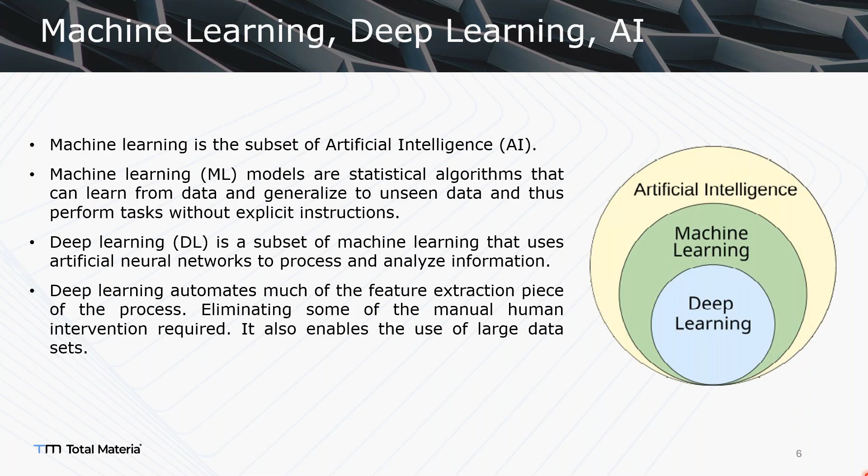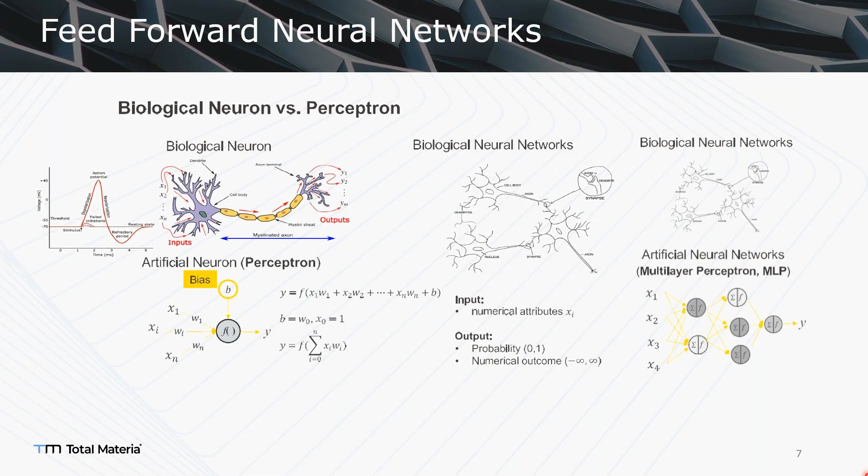So where did this concept come from? Basically, it came from the biological neuron, because we're trying to mimic the process of human thought, so we need to model this in the computer. When we model these neural networks, it's called a multilayer perceptron. I will go into detail in the next slides.

So what we are doing is trying to understand a relationship between input and output. We can clearly say that it is a universal approximation algorithm, because you can use it for different things with pretty much the same neural network structure. But in explicit programming, like normal programming, you cannot do that.

You need to customize your program in order to get a meaningful result, or in order to not get an error. So it is a really important thing. And by the way, as you can see, these equations are just a linear combination between them. You're just making a regression from this, but we're giving some nonlinear activation functions so that we can model really nonlinear concepts and relationships. Yeah, we can go on.

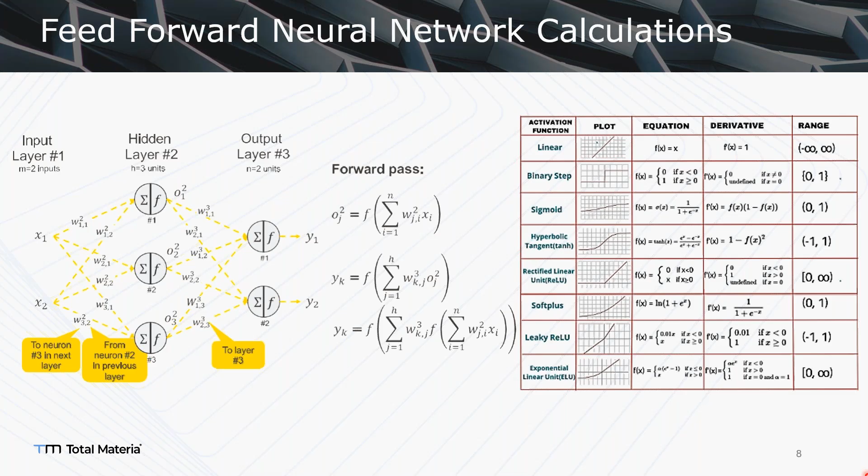Basically, what I understand is that we're just mimicking some outputs and creating a relationship between the input and output. Am I right? Yes. According to this, with a given data set. Yes. So this is how the forward pass works, not the whole training concept, by the way, just the forward pass. So you're just getting input and output.

So as you can see, here you have an expected value and an input layer. So you're just trying to get an accurate result from it. But from the start, as you can see, it is not really accurate because it's only one feed forward process. And I need to say that the weights in the start are arbitrary, so they are randomized.

So that means if you have a neural network, you can get different results as well, because of the initiation of these arbitrary weights, because it affects as well. It happens, but in really good neural networks you don't get it, or it's not a big difference, I would say. Okay, we can go on.

So can we say that the genetic algorithm is similar to the deep learning algorithm? Or are there any differences? The genetic algorithm is an explicit program. So it's just like normal programming. It tries to find the optimum solution, and sometimes it creates new data, I would say. But for this, you are not creating new data.

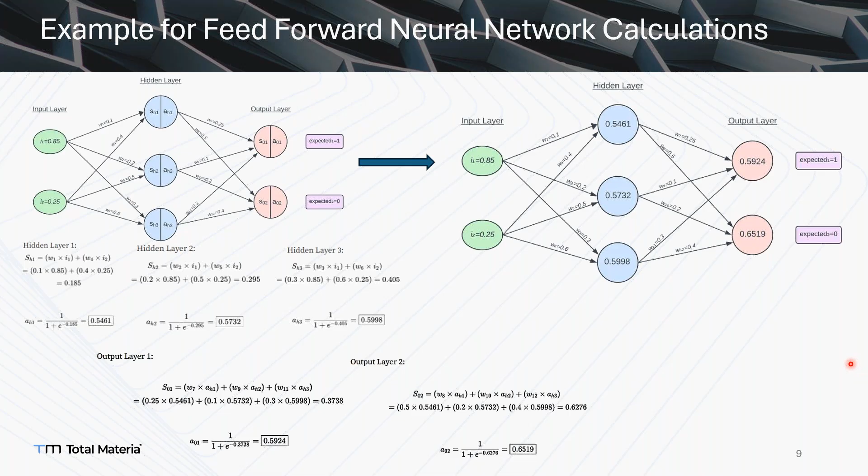So the important thing, and I would say the most important thing, because after these concepts were given to the world, it changed neural networks, machine learning, deep learning. So we have expected outputs and calculated outputs for the first feed forward process. We get that they're not similar. So what we need to do is accurately calculate this, right? We need to go for these expected values.

So in order to do that, I can define a loss function, which is the difference between them. By the way, loss functions can be different. This is just an example, and you are selecting your loss function by your need. You cannot use every loss function for every type of analysis or type of algorithm. So when we get this loss function, we can say that we have a total error in the neural network. So how can we decrease it?

So we can take a gradient of this, because we want to minimize this loss function. That's the whole thing, and it's called backpropagation. Backpropagation is an algorithm to compute the gradient of the loss function with respect to each weight. After that, the neural network propagates this error back from the output layer to the input layer.

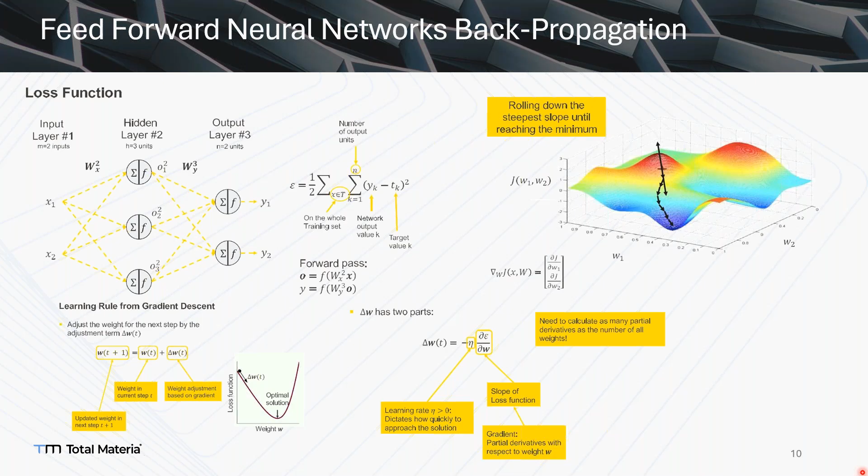Okay, this is the gradient chain rule for backpropagation. As you can see, every weight contributes to the output. So you can use the chain rule to calculate the gradients. We can go on.

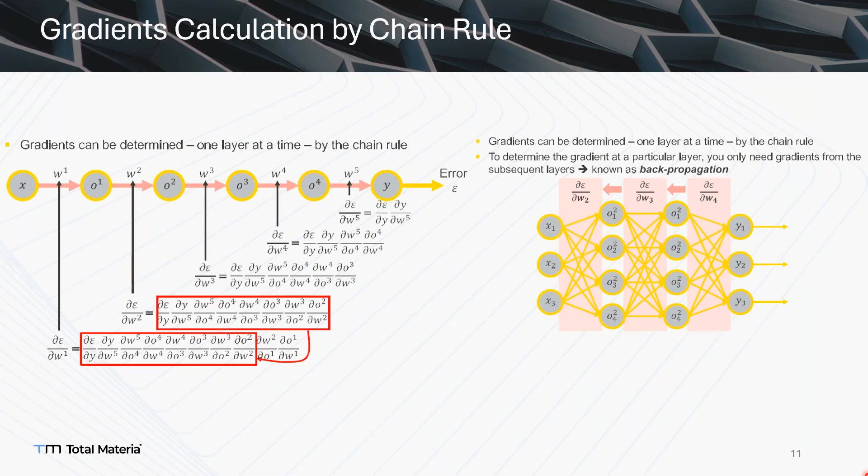Okay, so after that, as I said, you can update all the weights and run this sequentially. So at the end of the day, you will get a maybe pretty good neural network, I would say. Yeah, please go on.

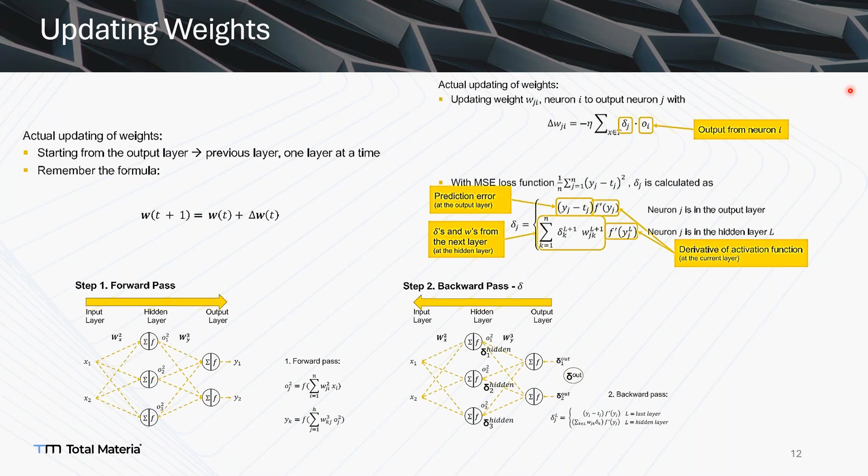The other thing is the learning rate. When we are doing gradient descent, we need to find a step size or learning rate so that we can get closer to the local minimum or global minimum. It's just a gradient algorithm we are approaching here. It depends on what the learning rate is. If it's too small, the iteration will be longer. If it's too large, we cannot find the optimum area because of the too large steps. Yeah, that's all. Yeah, you're right.

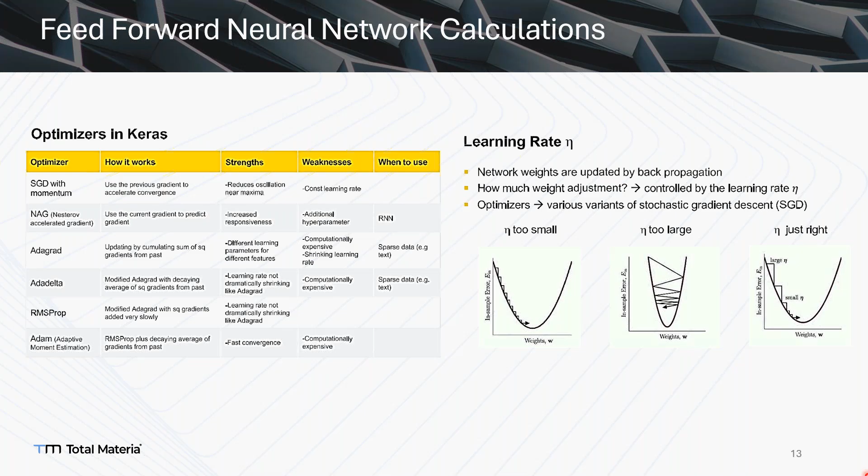Okay, so how can we use these algorithms for inverse design of metamaterials? The concept behind metamaterial design is really complicated, because you don't have a good way to design these materials. You don't have a behavior or a pattern for these materials.

So classical design algorithms could be really painful, because you don't know, you're just trying and getting FEM results, and after that you're just trying to get a closer stress strain curve to your model or your needs.

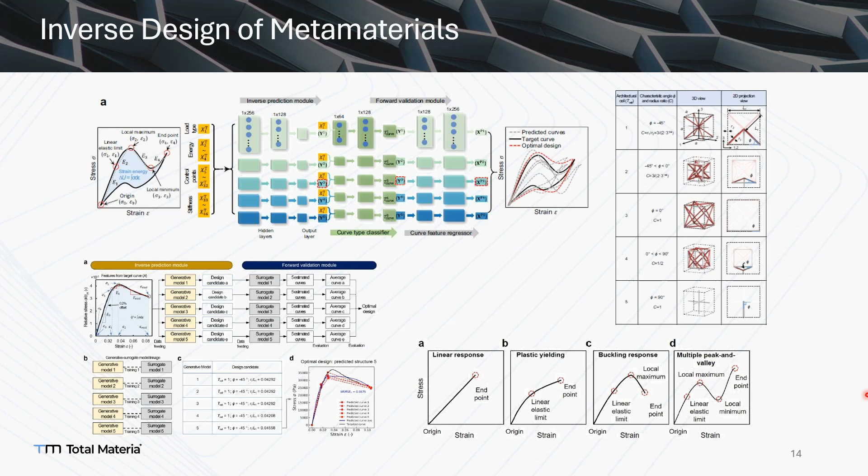I see. Okay, so as you can see, this is the results from this work. It calculates, or it gives the design curves, and from that you get these kinds of geometries. You can understand that it's really pretty understandable, these kinds of behaviors. Maybe I can say for the fifth, you can understand that we will have a local collapse. In the compression you will see a local collapse, and you're seeing a relaxation effect or a local collapse effect, and after that densification. It is pretty understandable, and it gives pretty accurate results, by the way.

There is also a normalized root mean square error prediction value in here. So we have a target curve and the measured one, which is what we have at the end of the simulations. So we are predicting which parameters, which geometry fits, or what we need actually.

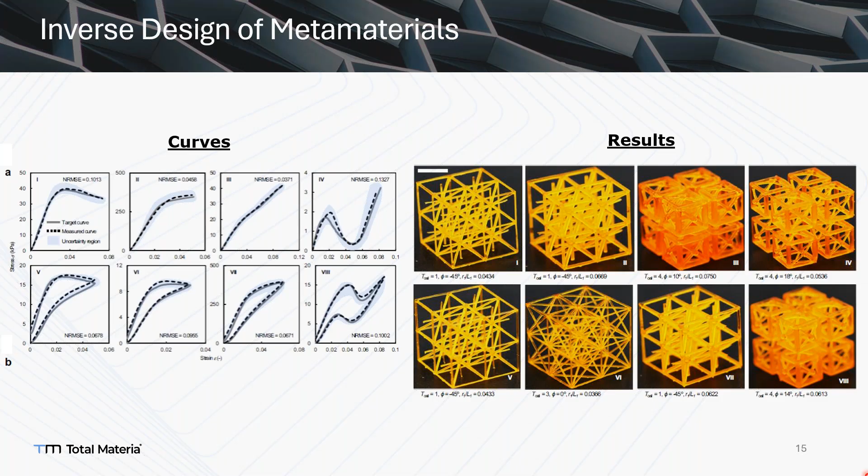I'm jumping to the optimization solutions. In the agenda, the second topic is topological optimization. But first we need to understand the differences between parametric optimization and non-parametric optimization. Parametric optimization was also mentioned - some parameters need to be handled, some features, some radiuses, some dimensions changing by the inputs, and also we have some results and feasibility at the end. These curves could be fit, and these parameters can be handled, and this is the final and optimal result. This is a parametric optimization approach.

Many techniques we can mention about it, but this is not today's topic actually. But at the end, you have some response surfaces according to the input parameters, so you can define everything - every parameter and every parameter's behavior affecting the results.

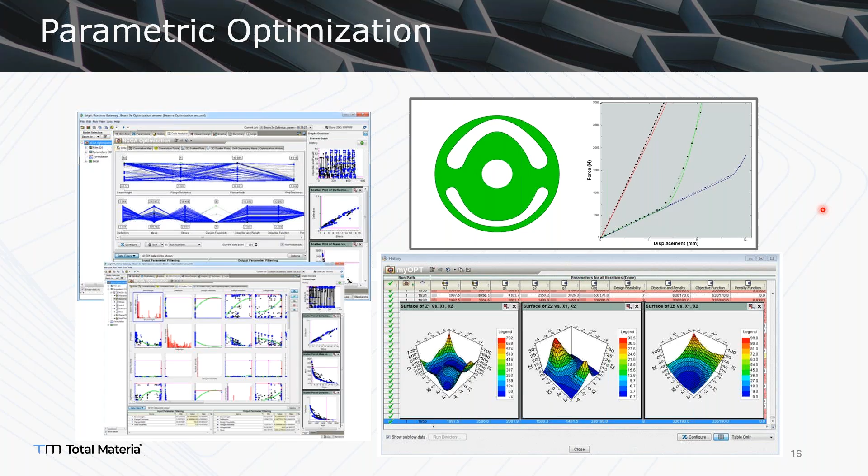In non-parametric optimization, I would like to say - four different optimizations we can mention - one is topologic optimization, and today's topic is also about it. The other one is shape. I will also mention shape later, bead and sizing.

This one is really interesting - for example, in your finite element model, you have a bunch of shell elements, and by changing only thicknesses, you are searching for some eigenvalues or some bending stiffness, for example. So we can go for it.

In bead optimization, you have some design areas where you could change the height of this feature. You are not changing the thickness, you are just changing the feature dimension, the feature height dimension.

So another one is the shape optimization. Shape optimization means that we have a finite element model with nodes and elements related to each other.

By changing the surface, this means changing the nodes, the surface nodes, inner or outer of the surface, to actually change the geometry. This is useful for fatigue analysis, by the way. I will also mention about it.

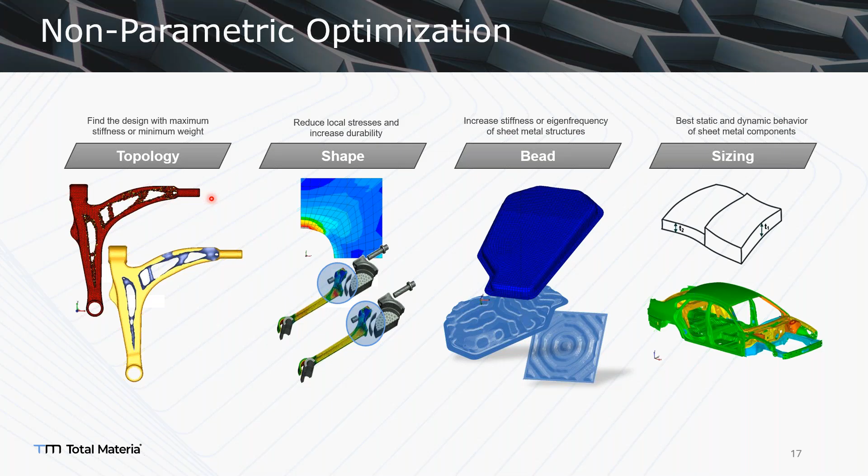In topological design variables, we mentioned the parametric and non-parametric approach. In the CAD model, we have some parametric dimensions, for example discrete or continuous differences, or some material properties like Young's modulus and Poisson ratio. These are the parametric approach. In the non-parametric approach, you have no parameters; you are searching for the final solution.

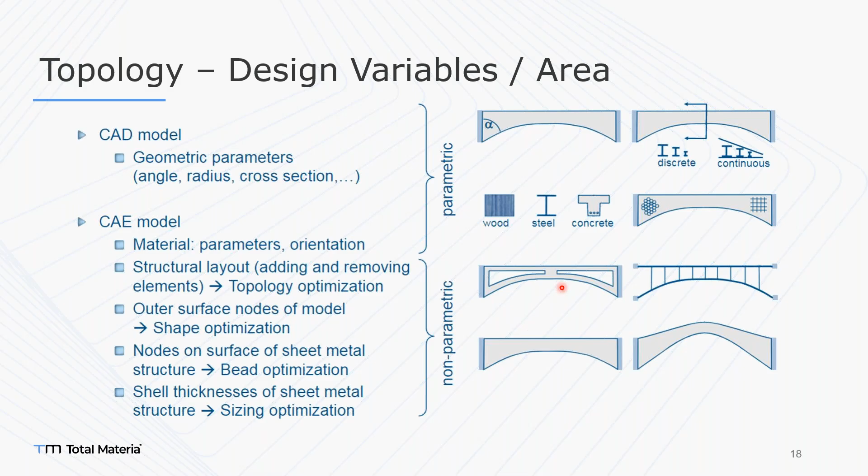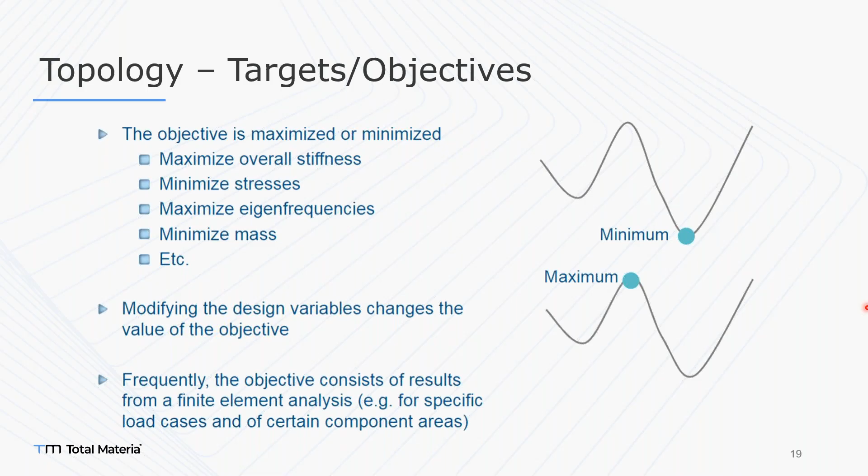So the targets are similar to the parametric optimization approach. You have a local minimum, a local maximum, and also a feasibility area. You just maximize or minimize something. For example, you may want to minimize the stresses and maximize the overall stiffness, or you could minimize the mass.

In order to do this, you will have some restrictions and constraints. We will also mention some symmetry conditions and casting conditions. Please don't think this is the only way to manufacture it, or the only way to get parts by additive manufacturing — that's really a big lie actually.

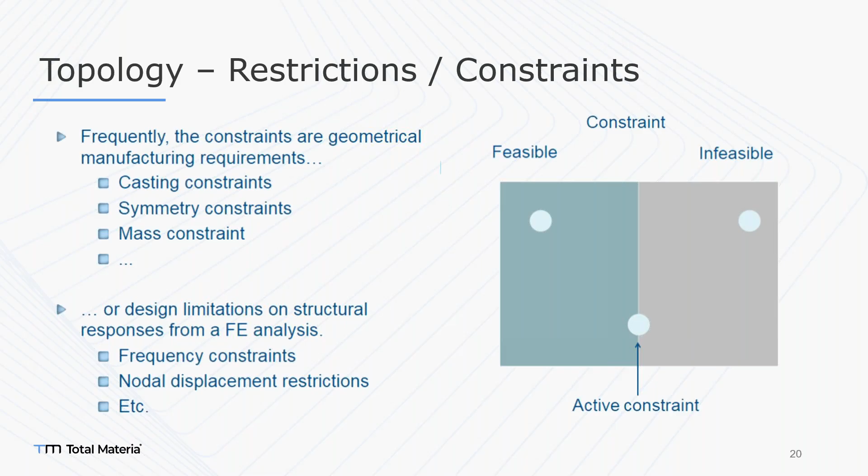With restrictions, for example casting restrictions, you may be able to create your part as a cast part or forging part. You may also be able to create your part as a machining or NC part. So you need to think about the restrictions and constraints for your manufacturing effects.

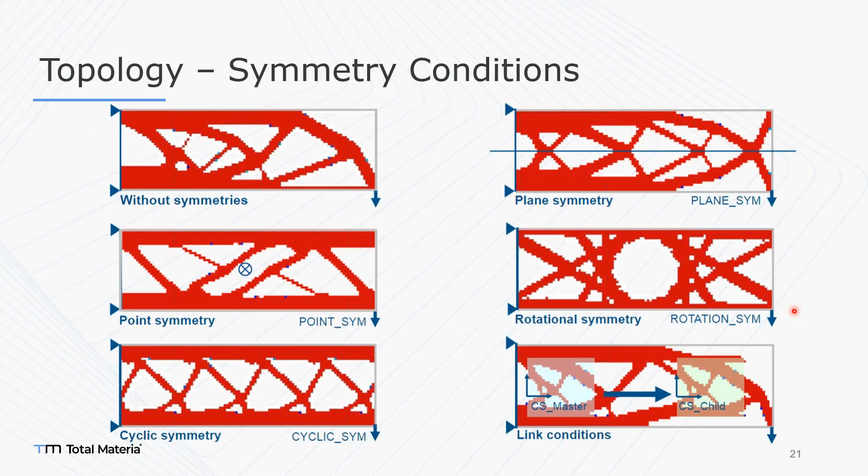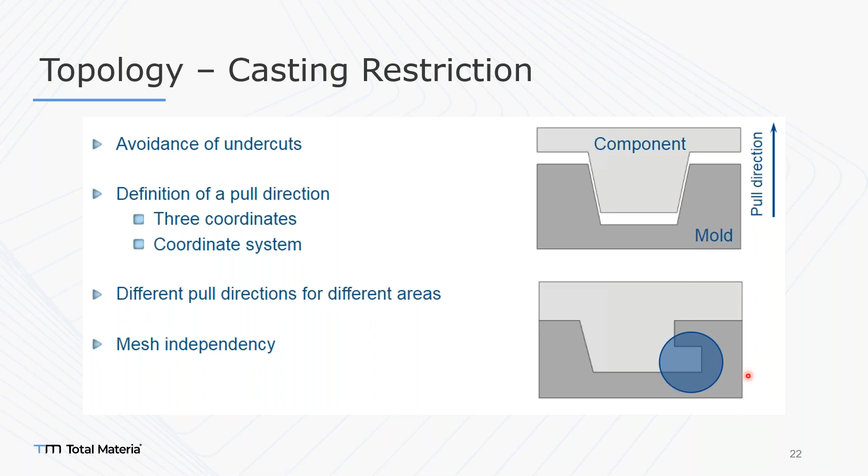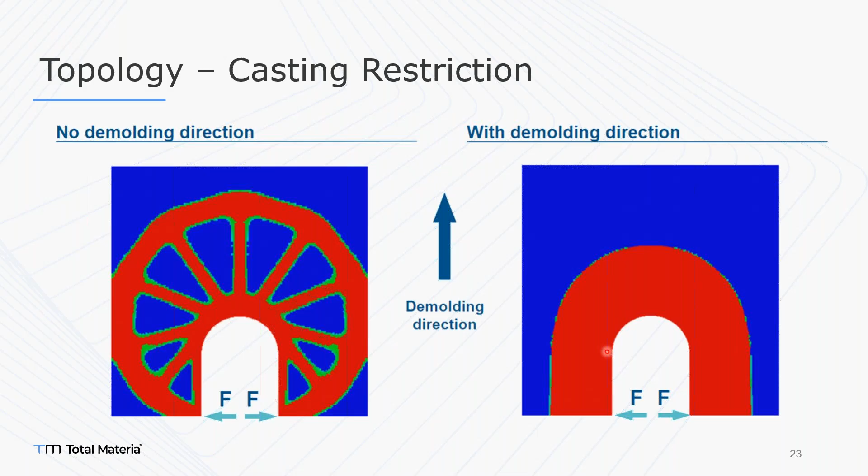Another example: you have the demolding direction in this direction. Without the restriction, you have a bunch of thick elements, thick parts. With the demolding direction applied, you have just one part like this one.

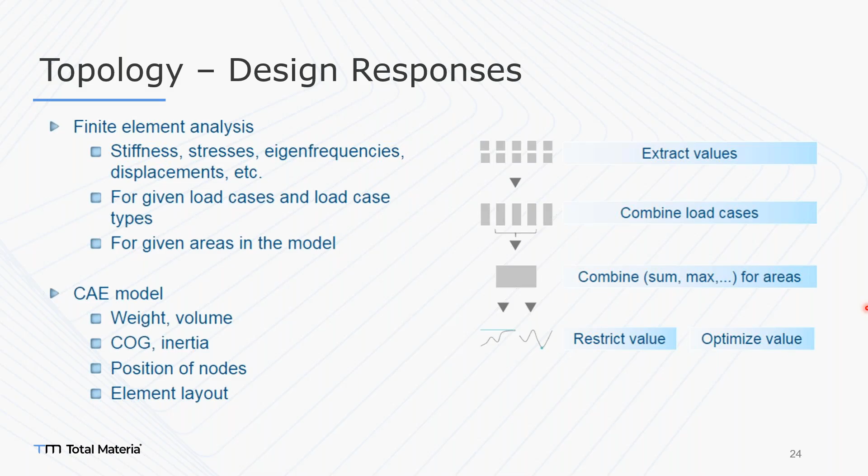So design responses in topological optimization — what this means is responses related to design, for example the combination of load cases, some weights or inertias, and the results, maybe stiffness and displacements. In finite element analysis, these are the responses at the end of your results. There's also another topic I need to mention: the load case scenarios.

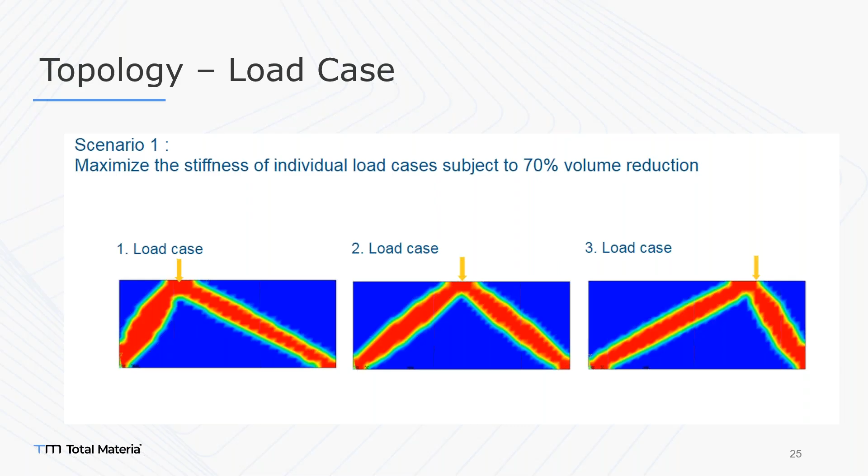So we have a bunch of load cases like this one. There is a restriction here at the bottom of the surface. Load case one applies this force here, here, and the third one is here. All these results are different solutions, so different geometries. The goal is to reduce the total volume by 70%. If we have a combination of these load cases, for example 3 loads, they will not affect the same time — they will have some weight factor.

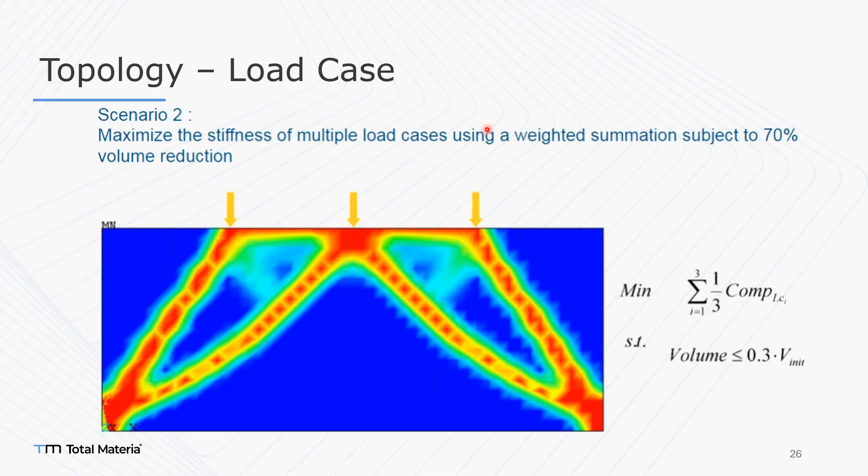Bartu also mentioned the weight factors in deep learning. The weight could be different according to your scenarios. For example, if you have a really low-probability scenario, you may also constrain the different weights of the simulation object. So you need to constrain it, but in the general engineering approach we generally weight all the load cases the same.

So in the topological optimization strategy, some questions need to be asked. We have a model and the design variables. Choosing the design variables: which design variables are we talking about? The variables mean which elements or which area we are talking about, and the finite element analysis responses. This is another challenge: if you have the whole model, for example 2 or 3 million elements, and you just want to go for topological optimization.

This doesn't happen these days, because even if you have really good CPU hardware, the time also needs to be considered. I will also mention the controller-based and sensitivity-based algorithms, which are different. And the objective, what we are looking for: minimizing the stress, the contact pressure, or reducing the mass.

So choosing the constraints also. As mentioned before, the symmetric constraint and the mass reduction constraints, for example, and the design variables. The number of design variables could be tough, because if you have a really large number of design variables, it could be hard to find the final solution.

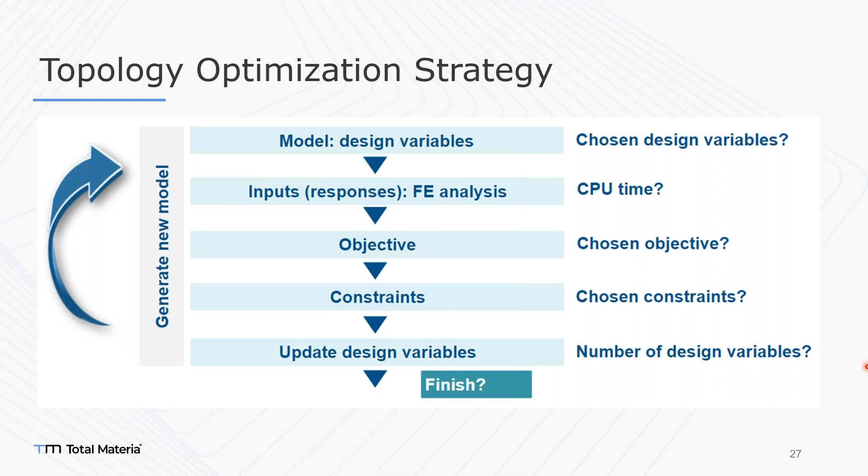So this is the controller-based and sensitivity-based optimization differences. Controller-based optimization is a very simple task. For example, you have a part that needs weight reduction. You have a stiffness. Basically just one surface has a boundary condition, the other point or surface has some loads. Your restriction is reducing the mass, for example, 60% of the total design variable elements. Basically, this is a controller-based optimization.

This is more like the gradient-based algorithm, which Bart mentioned before. It leads to really fast solutions. In sensitivity-based optimization, you can also affect and change the eigenfrequencies, not only the stiffness, but also other things, for example the fatigue level, I mean the total life cycle of the parts, or the contact pressure or some stress gradients you may also define in sensitivity-based optimizations.

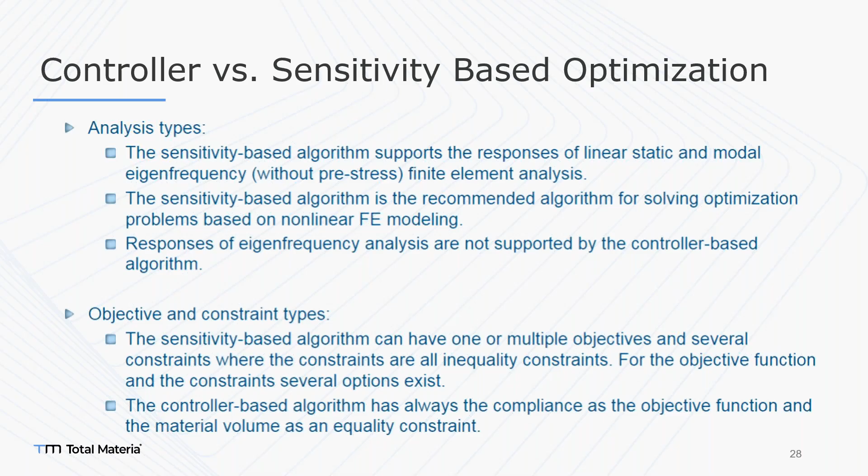What is important is the number of optimization iterations. The controller-based algorithm generally uses a maximum iteration number of 15, but for sensitivity-based optimization we cannot predict. Basically, 30 to 45 iterations could be normal for general sensitivity-based optimization, but this number can be higher, more than 100 iterations. That means over 100 simulations could be run.

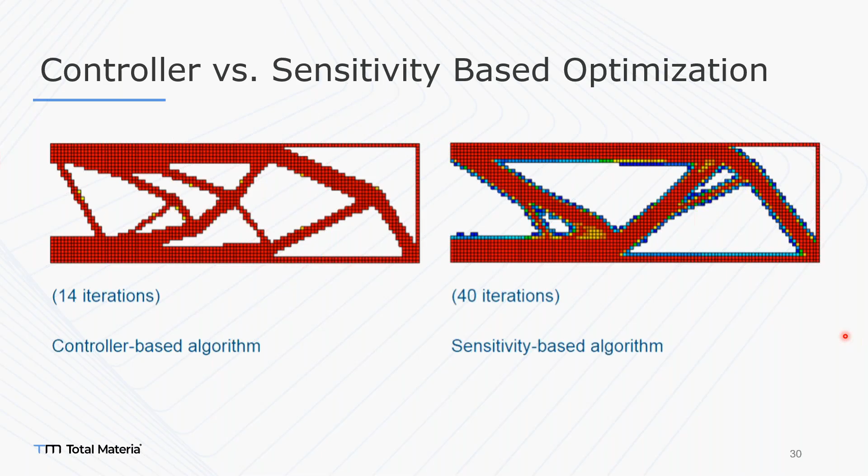As you can see, in the controller-based algorithm nearly all elements are 0 or 1. In the sensitivity-based algorithm, some elements are between 0 and 1. So it will be decided by the user whether it should be a surface like this one, or it could be changed, and then rerun the analysis with a different mesh approach.

So at the end, you have a fully CAD-conformant finite element model, and then you will rerun your model and get the validation run, whether it is okay or not. If it is not, for the local stress areas, you may go for the shape optimization, which I've shown before. So you may smooth these areas with the shape optimization, and finally you will get the optimized CAD reconstruction. At the end of the shape optimization, you will also have a broken CAD file, meaning the STL or IGS file.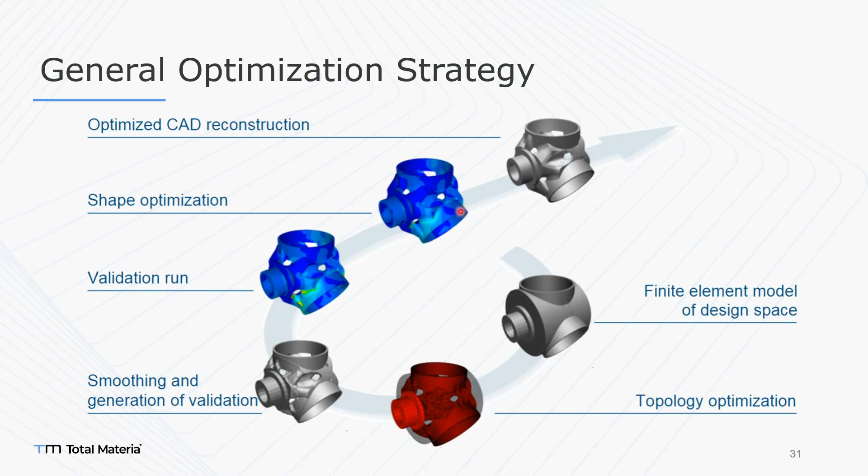So you cannot directly use your geometry at the end of shape optimization. You can use your finite element model, but you cannot directly use the CAD at the end of the shape optimization. This is the optimization area.

So if you go for fatigue, basically I can say there are two different approaches in the fatigue algorithms: stress-based fatigue and strain-based fatigue. These are the general approaches. If you go for high cycle fatigue, you may use the stress-based fatigue approach. If you have low cycle, you should prefer strain-based fatigue, but it is also applicable to high cycle fatigue.

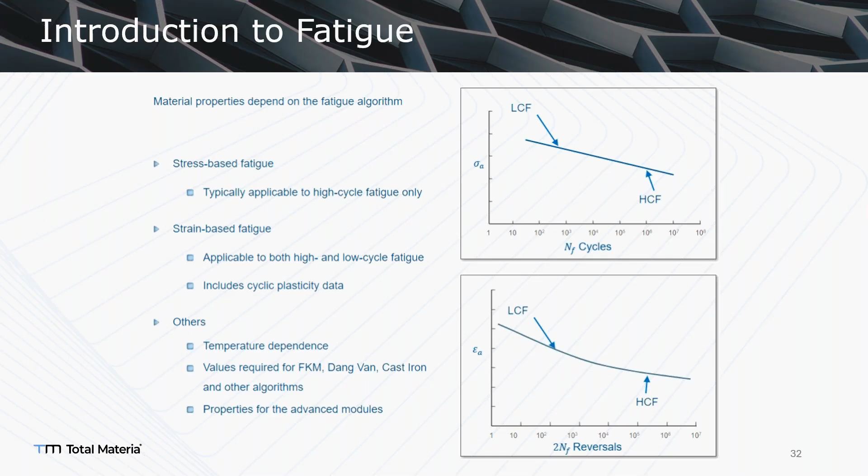So why is fatigue loading important? Basically, you don't have a very smooth, very basic load application in real life. In real life, your measured load data looks like this one. And if you separate it by direction, you have this. For example, multiple road events you may consider. So you need to clean your data and understand your data, whether it is applicable or not, or whether there are any errors or repeatable events in this data. You need to focus on it.

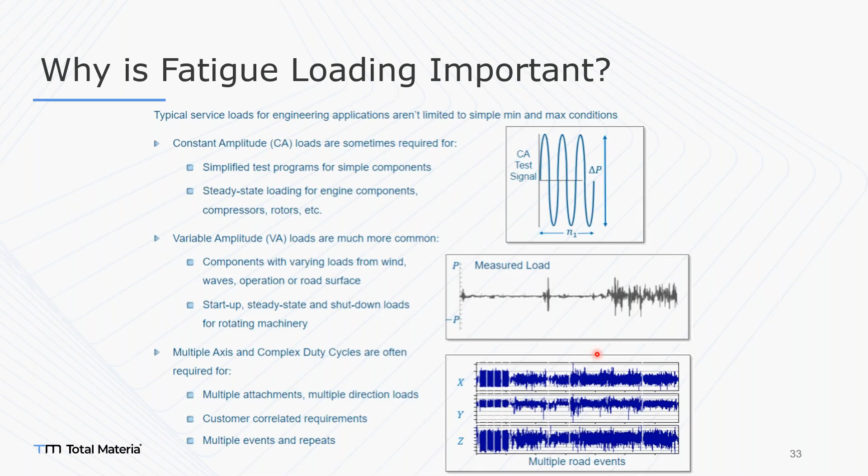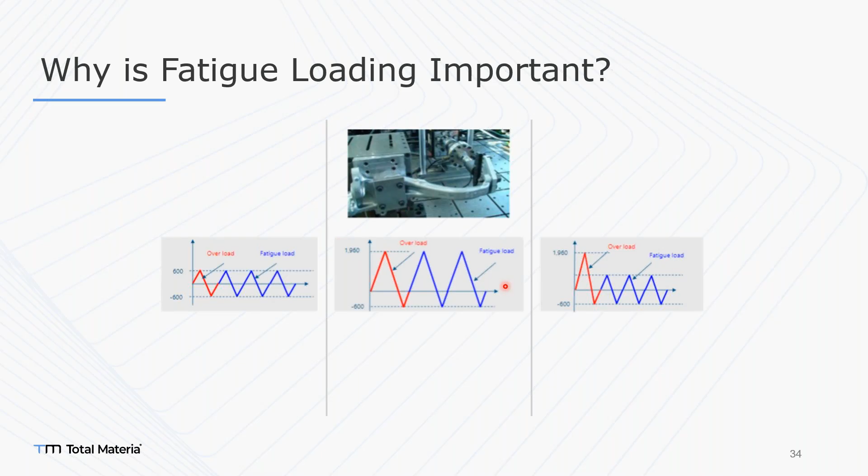And another thing: if you consider three types of loading like this one, we have a part and the test bench here. We have three different types of loading. One is a little bit lower, another is higher amplitude, and the third is the combination of the first and second. At the end, the first and second have the same broken area, but the combination of these two loads could be different. So loading data is really important.

You need to focus on whether there is any overloading in your fatigue load. It depends on the load history. But we are saying that if it is high cycle fatigue, we assume a linear approach. So we can just sum the whole damage and compute the fatigue results with the linear approach. And this approach does not depend on historical events like overloading. So you need to change your approach, actually.

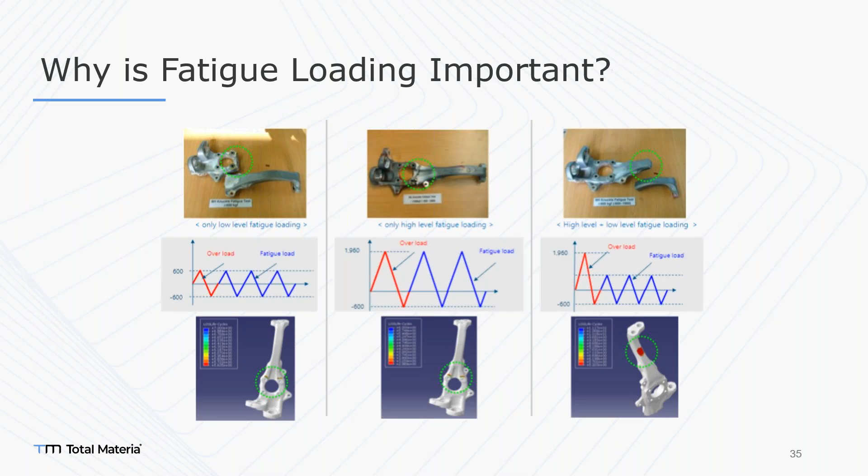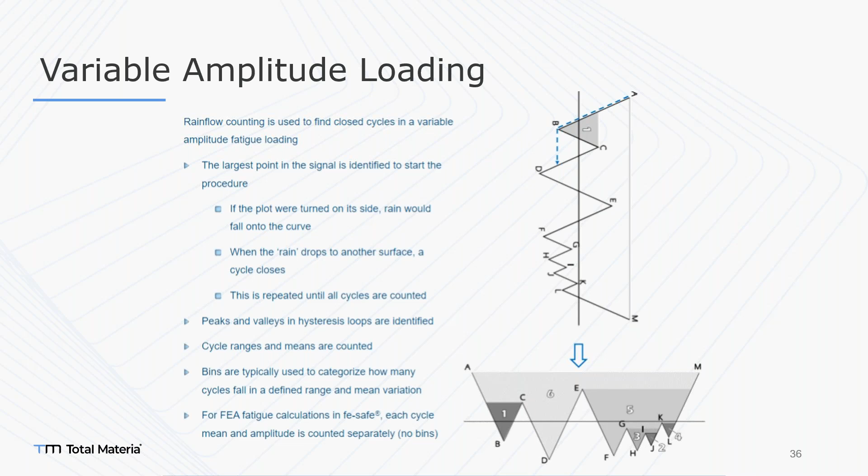So there are some different techniques, like rainflow counting here, defining which cycles could be similar to the basic loading scenarios. With this technique, you may reduce these load events into a number of repeatable events. So basically, you can use Miner's rule, the high cycle fatigue approach.

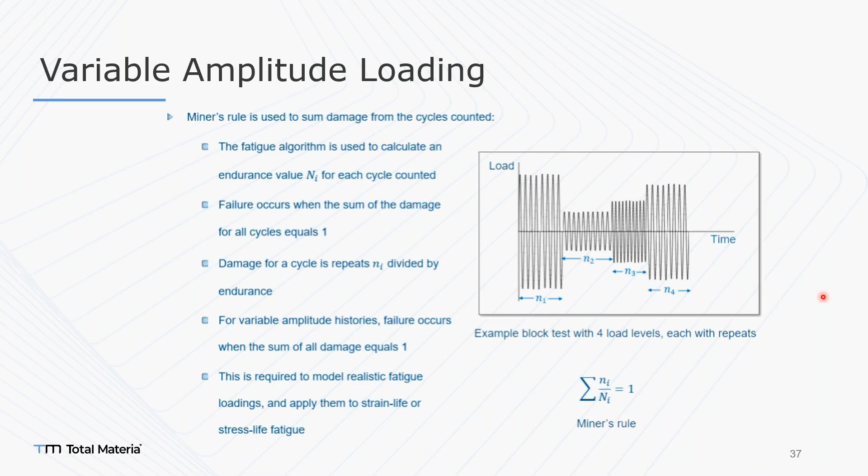One last thing before we go to Total Materia. The surface finish also affects the fatigue results. You know, there is a KT factor, which is affected by geometrical features, surface finishes, or anything else. So you also need to consider this. Okay.

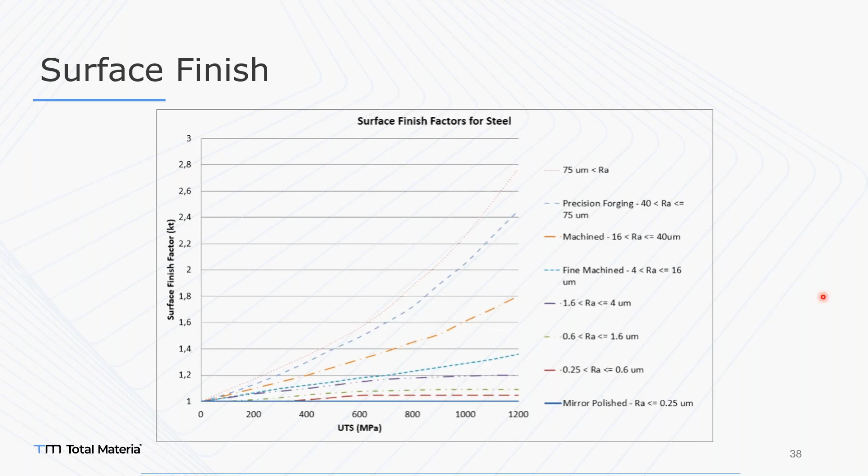Zaim, are you there? Yes, sure. I was following your design. There are some cracks in the design. Maybe it would be best to start with the CAD design to define the material, or in Total Materia there is an option where you can basically check the materials' different properties, right? So you will be able to find maybe a more durable material.

That reminds me of earlier in my career at Total Materia, six years ago I guess, when Toyota engineers were looking for one specific material from their historical use, and they couldn't find the material, and we actually found the replacement standard with new, up-to-date material information, and they were not sure if this was the correct or accurate material to use. This new material was for the steering wheel column, all right?

So they added new ingredients, content inside the material. That's how they updated it, with silicon metal. The silicon metal content was a little higher, because that lets the material flex more before it breaks. And that was one of my first technical support cases at Total Materia, and I said, all right, this is the deal. This is very much related to material behaviors, right?

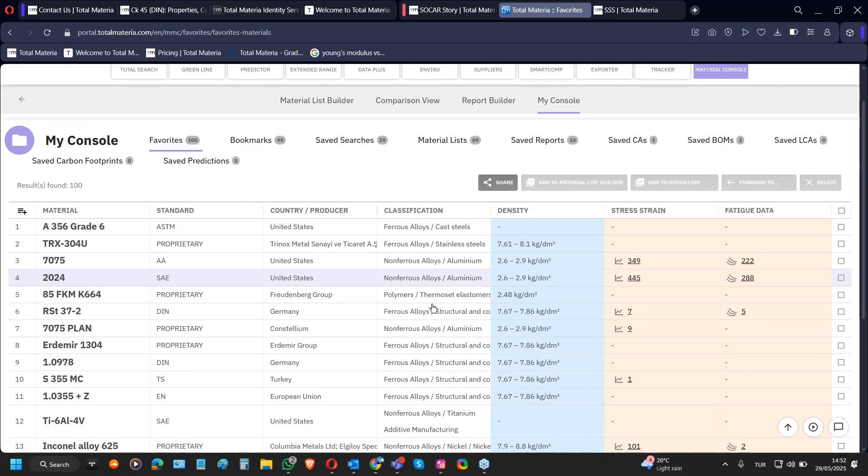In each presentation, whenever I introduce the tool or in my webinars, I'm always mentioning that there are a lot of things you need to take into account, right? So here's an example. I believe you can see my screen in the Total Materia platform. This is my favorite material list, basically, in different classifications, different types of material.

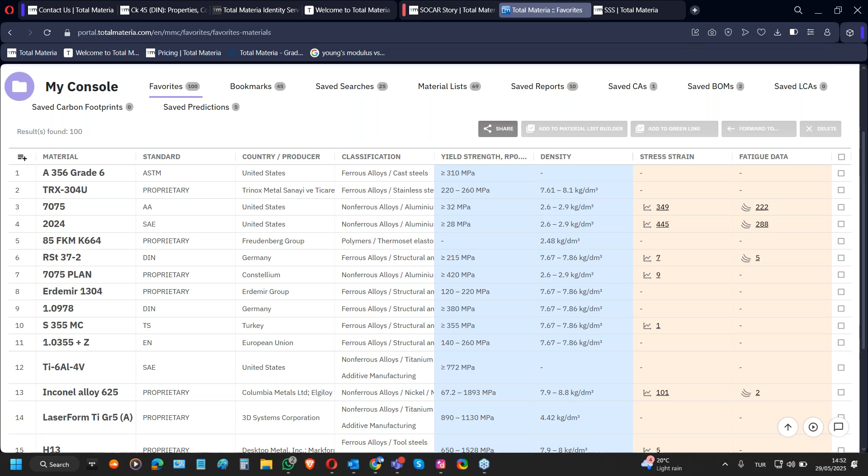This could be a right candidate for my design, and I'm looking for yield strength and tensile strength values at the same time. I'm checking if they have stress-strain and fatigue data. I'm just checking if this material is suitable for my design. But still, this is not enough in most cases, right? So I want to add them to my material list builder to check.

Actually, I need to compare these materials, right? I can compare up to 100 materials side by side, but it's more effective to move this material list to the analytics screen. This is what I do. It's very easy to compare all these materials. Okay, these are suitable for my design. I want the lightest one,

and definitely I need the cheapest one at the same time, because titanium will usually be very light. But these are the price ranges. Oops, we have some very expensive material right here, but the density level is not that good, right? We have very cheap material, but very high density, so it is very heavy. So I need to focus on this material list here. This is how I can see all these materials side by side.

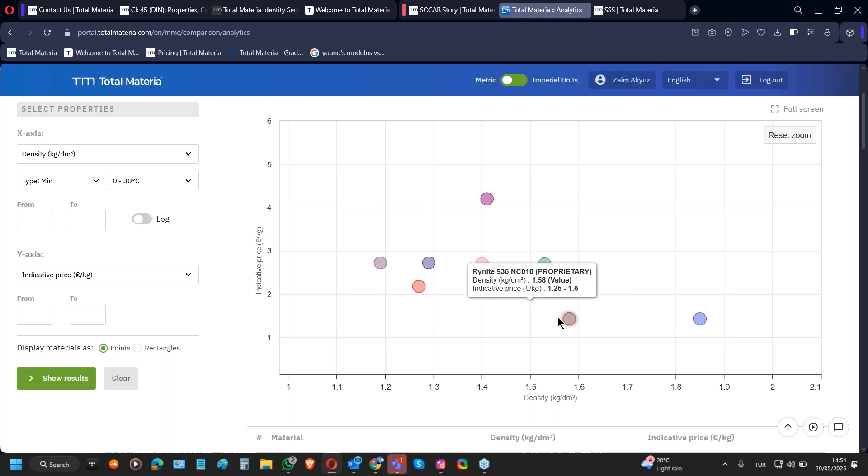So basically I have cheaper options and the lightest. I can see the limitation: 1.2 to 1.9, as I can see, is the density limitation according to the price.

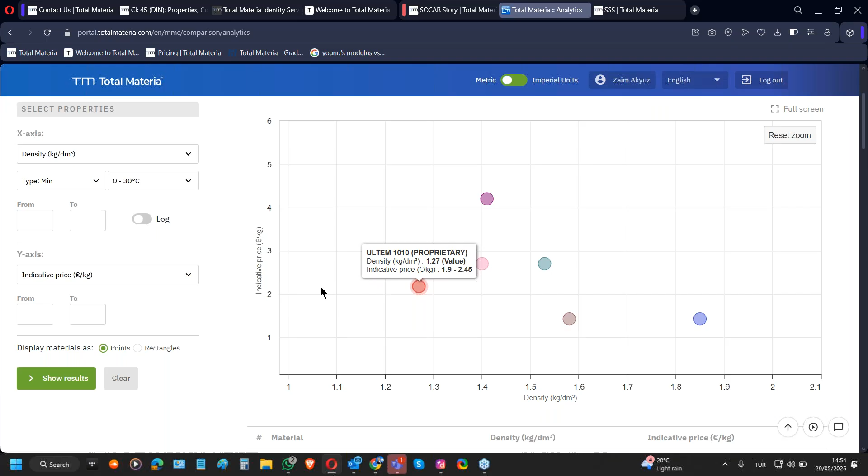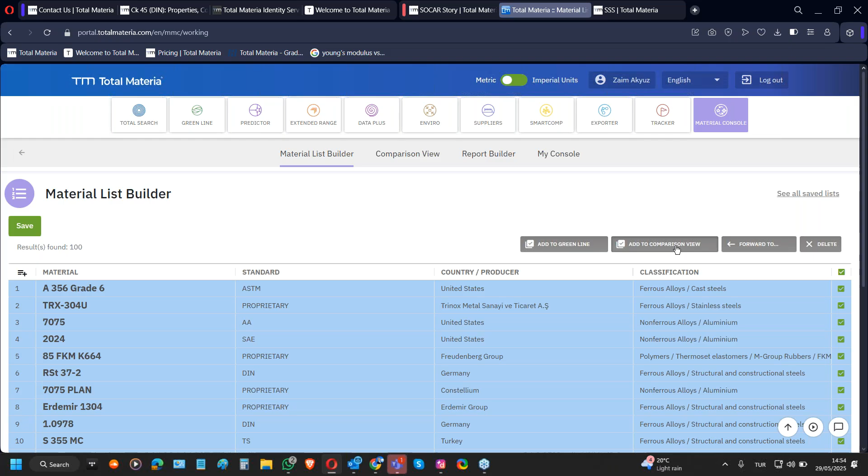Can we also recreate this chart? Not the price. I want to add the Young modulus, for example, modulus of elasticity versus density. It could be much better if you are working on eigenvalues or looking for NVH analysis. Definitely. I'm checking all these materials again, and I'm adding not material but property comparison.

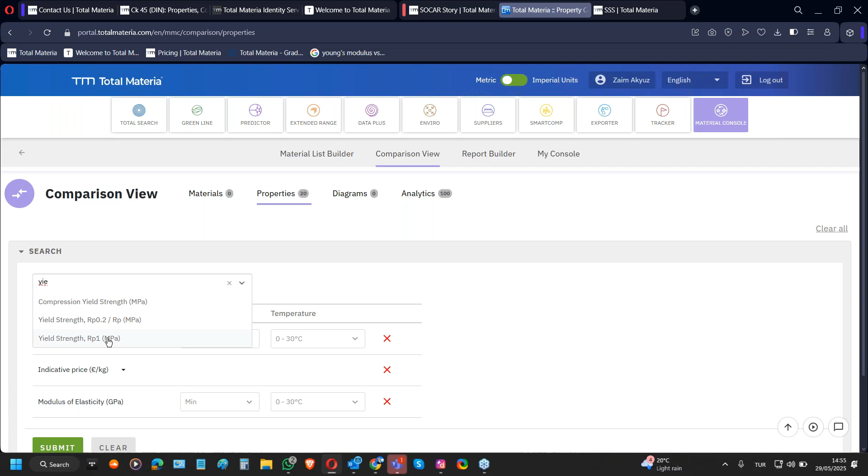Now I can add the same density, maybe pricing, but at the same time, what did you say? The modulus of elasticity, yes. And we can add yield strength at the same time, right? Yield strength, yeah, could be very good actually. And tensile. We can have up to 5 different properties at the same time.

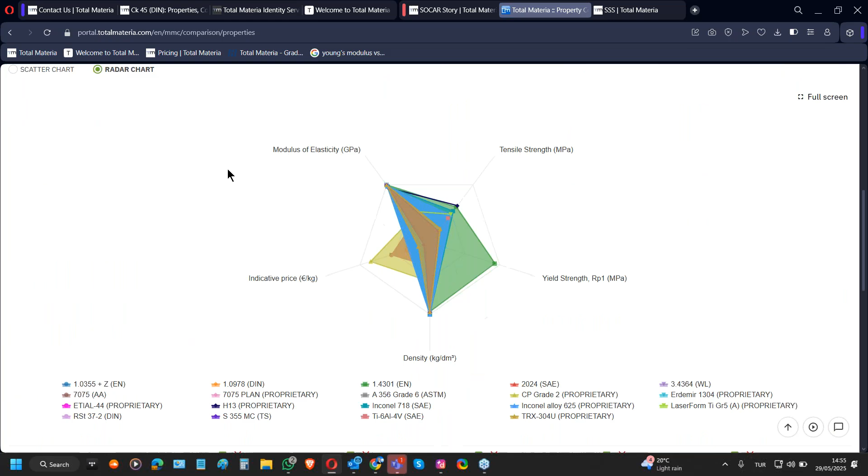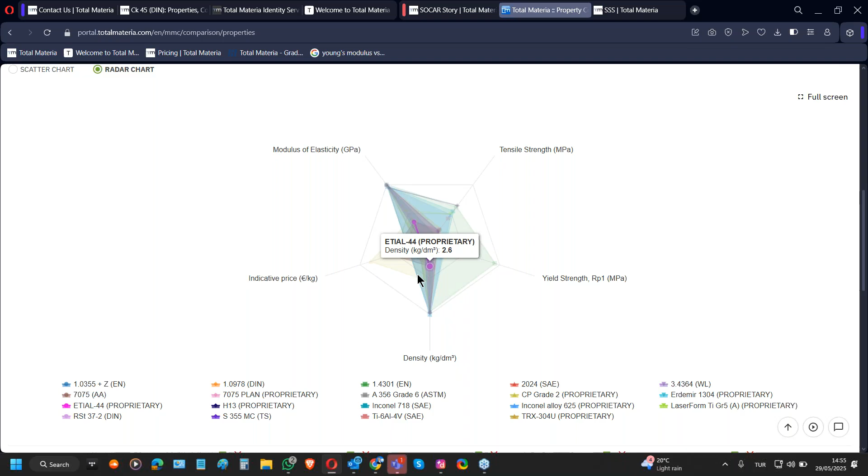So these are the materials, but I want to see all of them together. What about a radar chart? Cool, that's good actually. Some of these materials have a high modulus of elasticity. These have very high tensile strength, and some of them are very low. If I want the highest tensile strength value, I can check all these materials in one chart, and you can see the whole data set here, right?

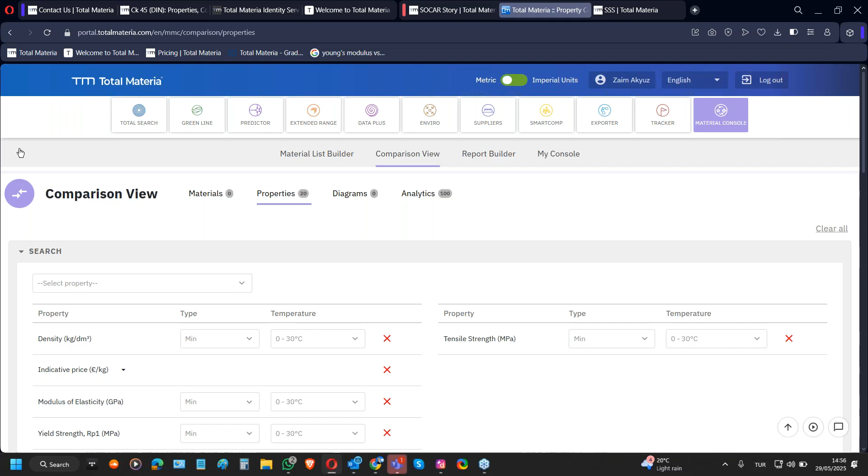So this is the radar chart. I can compare the properties. I can compare some materials individually, and also all of them together. I can save these materials, right? Well, this is the saved material list. And I will be able to share it with my simulation department, let's say.

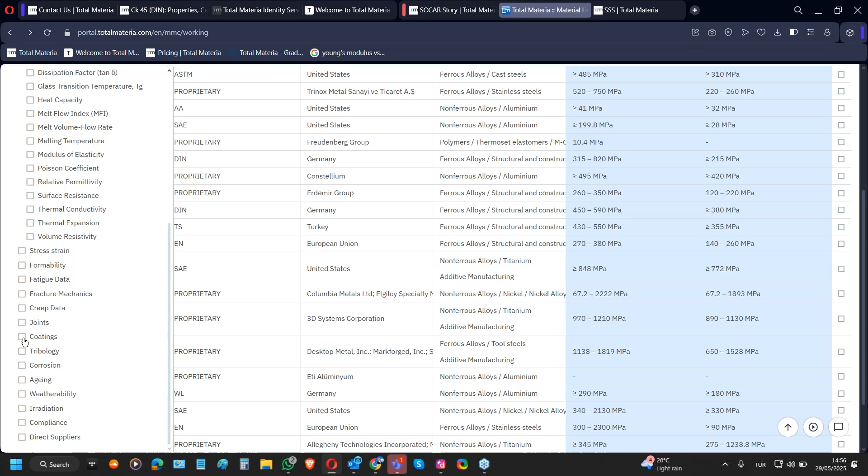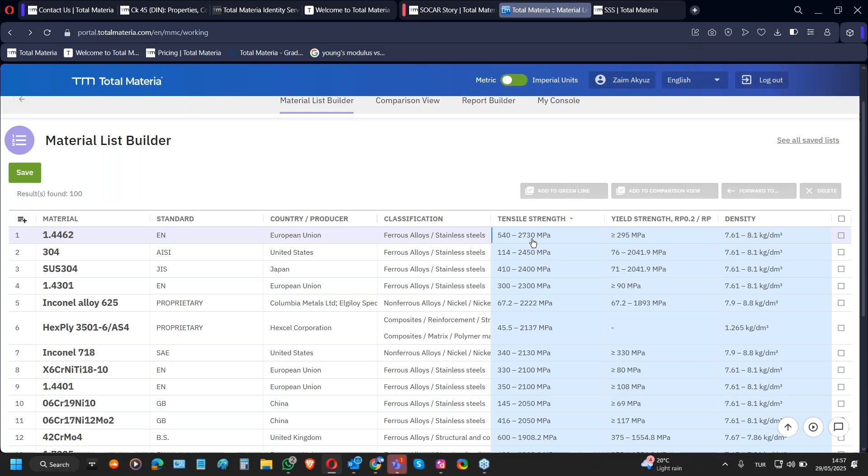Still the same. I'm just clicking any properties that I want to see here, including coatings, joints, and suppliers, if I will be able to purchase this material, right? So these are very, very important properties. I have 100 materials in my list, and I want to see the highest density. You see the density range I have. I want to see the highest tensile strength value, and this material is good.

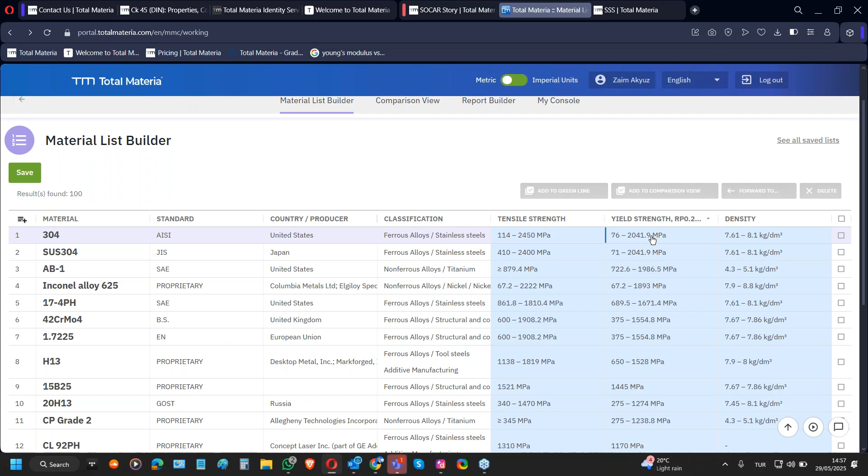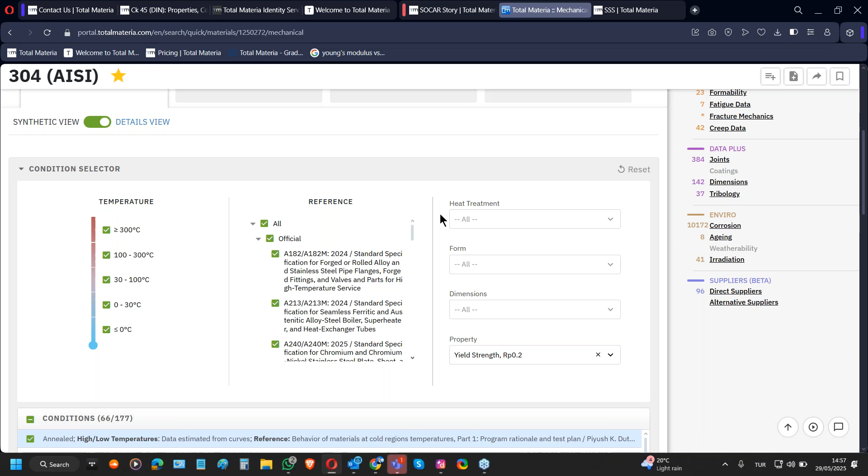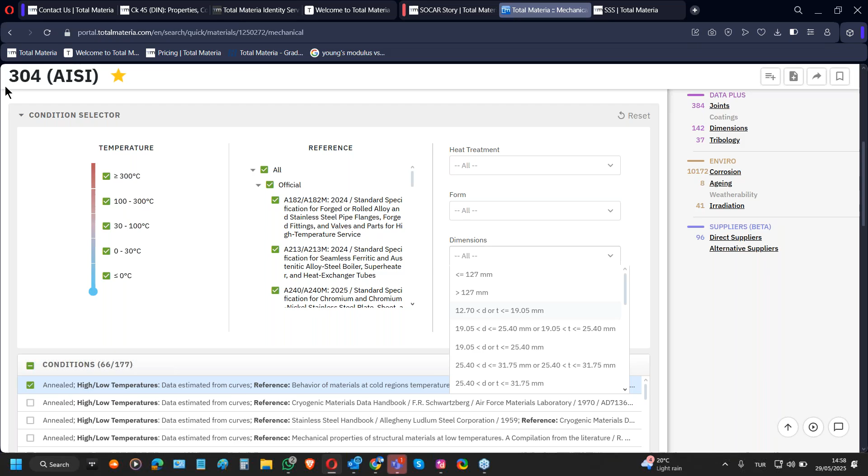Same material, but look at this, how many different heat treated forms we have. We have bars, castings, as you mentioned earlier, fittings, and all these different forms, including different dimensions. Like we have 2 millimeter sheet metal and 8 millimeter sheet metal. It's gonna be a totally different story, right? So you need to understand not only what material we are talking about, but what details we are talking about. Temperature dependent values, right? The mold processes.

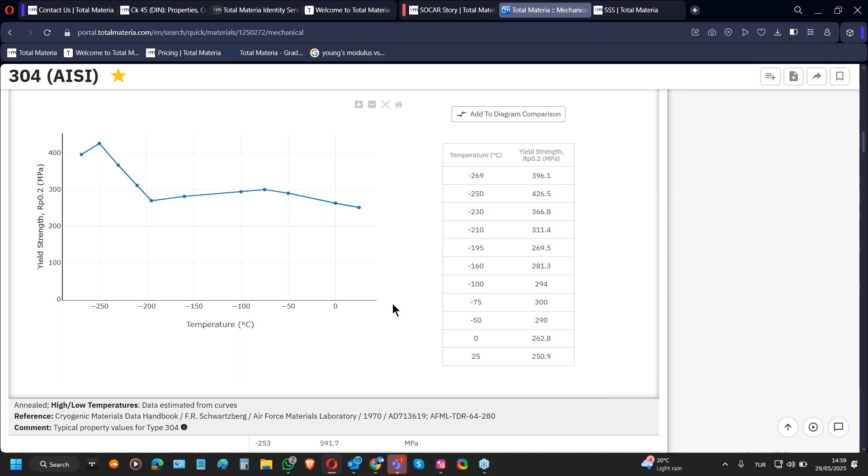One of our users had a technical question: they are using CATIA and designing the mold. Everything is fine. The first 50, 60, 100, 150 parts are perfectly working. After that, the mold is getting warmer, up to 80, 90, 120 degrees, and then the mold shape is changing so you are not getting the same results. So he said, I am the mold designer, but something is wrong here. And we found out that the mold is changing its shape when it gets warm.

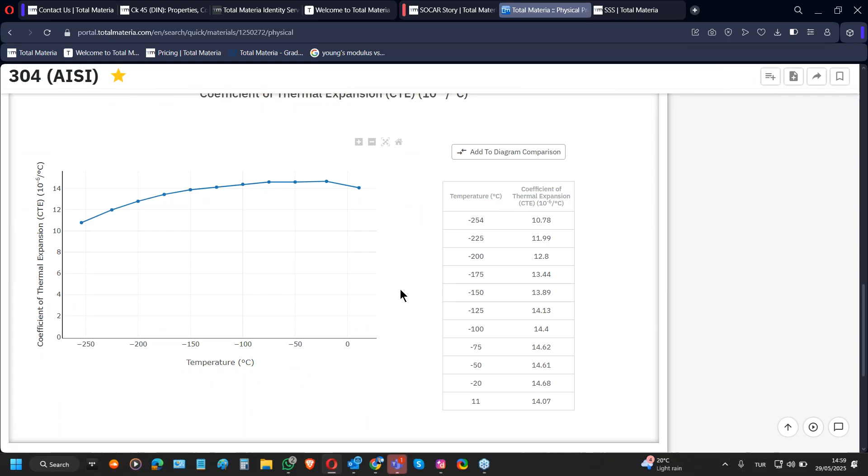So we are doing our jobs, actually. Yeah, definitely. He needs a lot of data about the materials to understand why this mold is changing its shape, why this material is not suitable for this design. We have heat treatment options.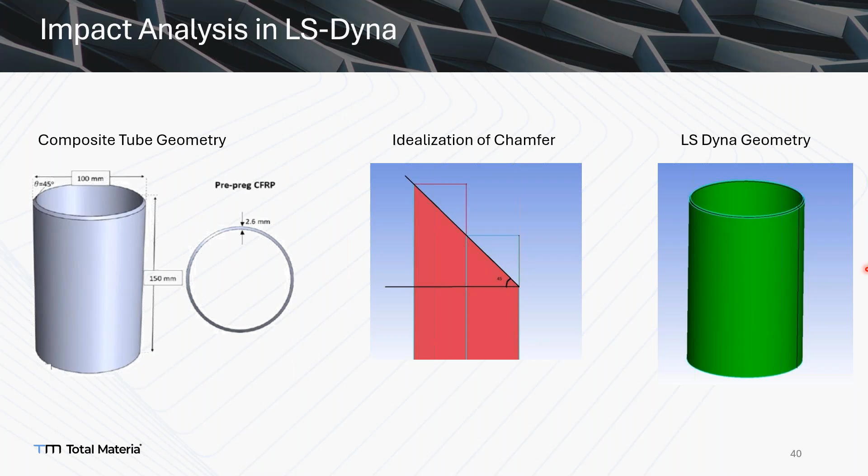We can go on, I think. Okay. So basically we have two parts, which both are composites modeled in here. And we used enhanced composite damage material 54, 55. And these are the material properties for one CFRP lamina. So we just modeled it in LS-DYNA as a layup.

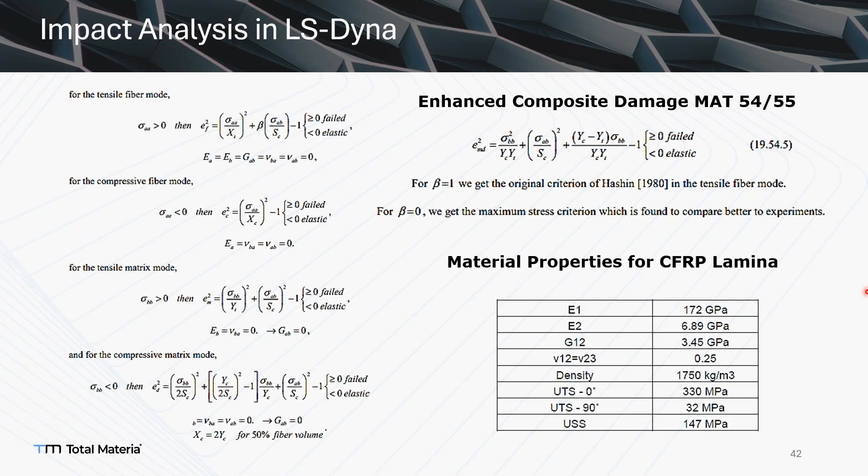But actually we have different stack directions. Yeah, of course. Here. Of course, it is. We can go on, I think.

Sure. So the contact properties are really important. Between those two different composite tubes, we used a contact automatic one-way surface-to-surface tie-break algorithm. And for the general contact between surfaces, for the composites and the rigid impactor, we used automatic single surface contact.

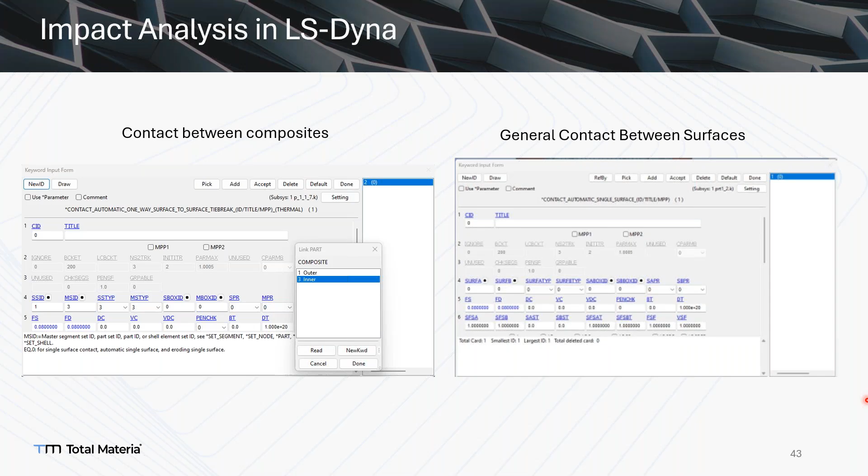And by the way, for this analysis, we didn't use any cohesive zone because it's a preliminary analysis, I would say. But you can implement it in this contact definition in one-way surface-to-surface tie-break. You can use the cohesive zone method with the type options. We used, I think, two. You can define it with option 9. Okay, we can go on.

Yeah, actually, just think about it. If we just put the whole composite direction to 0, I mean, all the layers in direction 0, we will just get a really bad buckling shape. Am I right? Yeah. That's why we are also using the symmetrical approach. Actually, we have 8 layers in each one, so this is a symmetrical one. So the 45 degrees is actually avoiding the local buckling collapse. Am I right, Bartu? Yeah, you can say that.

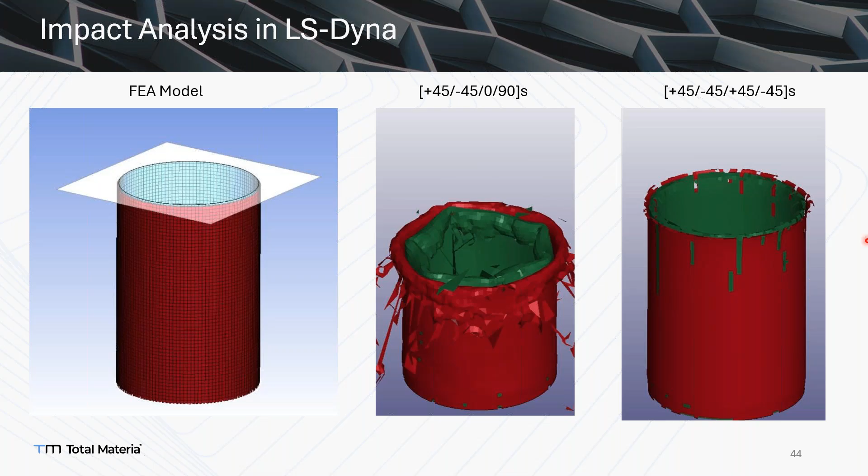You can say that. But what happens is you're losing your impact absorption a little bit. When you put other layers in the impact direction, you're initiating buckling in the fibers, because we're using unidirectional fibers here. Otherwise, your initiation will most of the time be on the matrix. It will affect the fiber buckling a little as well. But I think the left side is better at this. And adding a 90 for the inner layer is good for stability as well. What do you think, Erdi?

Also, there will actually be much more deformation on the parts. So that's why we can say that there will be much more internal energy on the right side. I mean the total strain, total elongation of the material because of the deformation. Yes, but when you think about the combined stiffness... yeah, you're right. You're right.